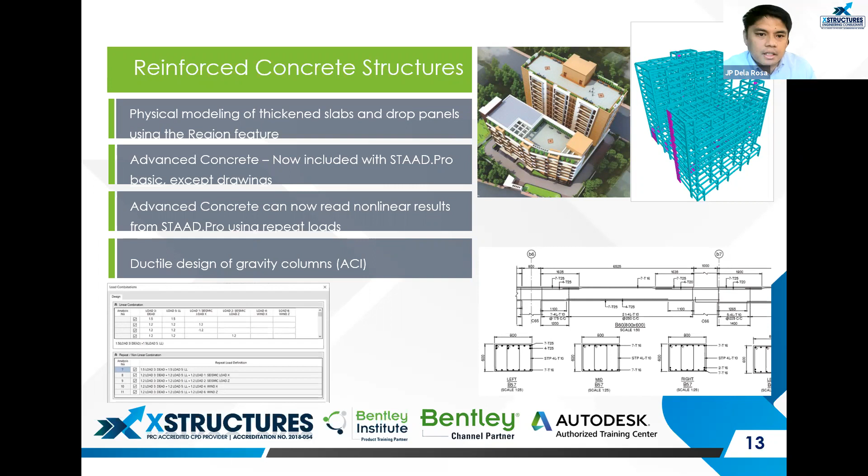Okay, so structural worksuite - for this webinar series, we're gonna show the integrated applications of STAAD.Pro, the RCDC, RAM connection, steel AUTODRAFTER, and RCDC FE. So at least 5 softwares we're gonna integrate, directly, direct integration.

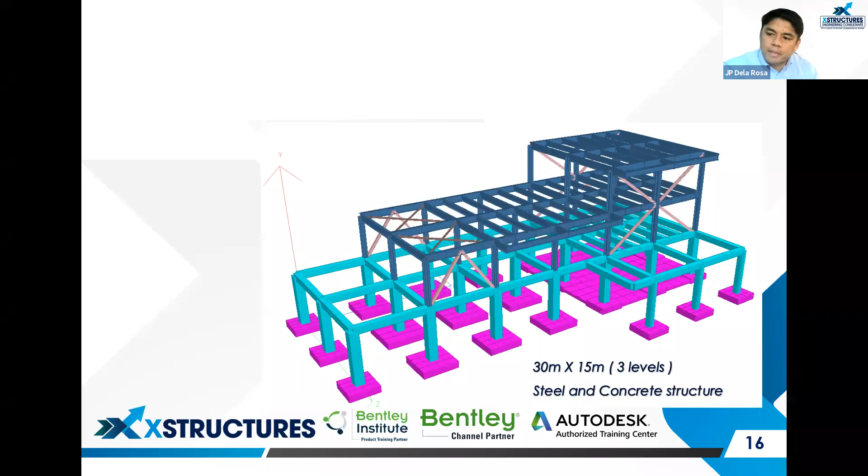Okay, so this will be our sample structure for the integration. I will use this model for full integration. It's a 30 by 15 meter, 3 level steel and concrete structure. And the problem statement here is: how many hours do you need to substantially deliver the analysis and design documents of this structure? How many hours do you need to spend on structural modeling and analysis?

How many hours needed for analysis and design reports preparation, design drawings, estimates, bill of materials, bill of quantities, and project schedule? So based on our experience, it is reasonable to spend 136 hours of design time for this structure, but only using structural analysis software - let's say STAAD.Pro only, STAAD.Pro, Excel, and AutoCAD. But actually, this would be composed of a team of engineers and drafters.

I would like to show here that even a single engineer can do all the work, like a one-man design team, using of course integrated software. So you're gonna see later how. Okay.

Okay, so this is how I break down the 136 hours. Okay, so 24 hours will be for modeling and analysis. And then another 32 hours for design, review, and detailing. Okay, and then 40 hours for the drawing preparation from scratch.

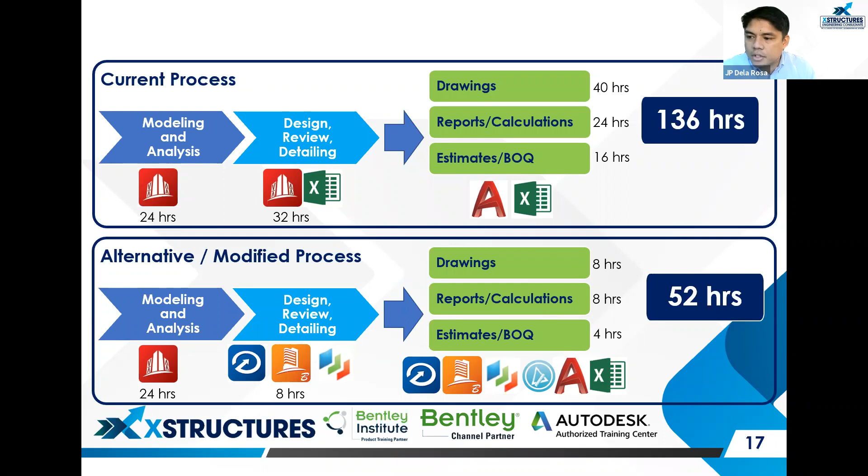So below, we are recommending the alternative and improved process, shown below. Using integrated software where you can have benefits like saving time on structural analytical modeling and reducing error.

As you can see here, above you're only using STAAD.Pro, then Excel, and then AutoCAD and Excel.

With the below recommended process, we're still gonna use STAAD.Pro for the modeling and analysis, so we'll have the same 24 hours. But for design review and detailing, it will reduce to 8 hours only, since we're gonna employ 3 additional software.

We're gonna remove Excel here, your templates in Excel, so you don't need to build your design templates anymore. It's already built in with RCDC, RAM Connection, and RCDC FE. This is all full graphical. Excel is more on numbers and words type, but here it's full graphical.

For the drawings, we can reduce to only 8 hours, since all the drawings will just be extracted from the software itself. RCDC and RCDC FE can produce high quality drawings, which you can simply export to AutoCAD and put on a proper title block, and that's it, you already have the final plan.

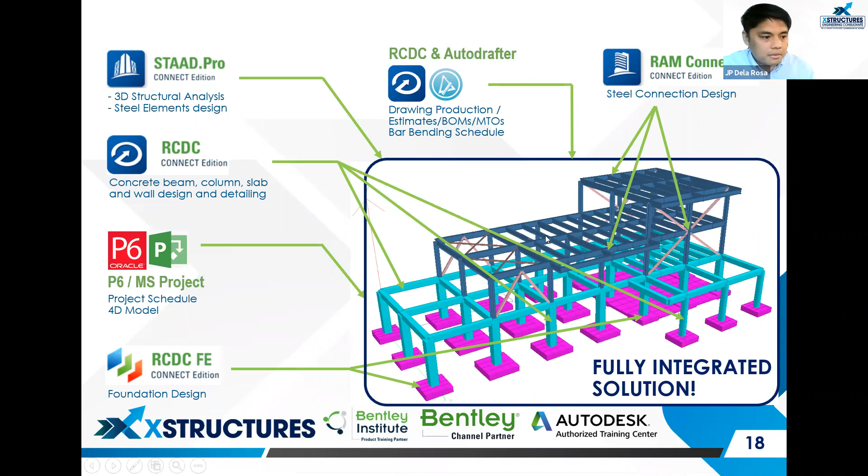Okay, so these are the softwares we're gonna use on the integration - 1, 2, 3, 4, 5, so 5 softwares.

STAAD.Pro is a general purpose structural analysis software for buildings, bridges, containment structures, embedded structures like tunnels and culverts, pipe racks, steel, concrete, aluminum, and timber buildings, transmission towers, even elevated water tanks, stadiums, or any other simple or complex structures. So definitely you can use STAAD.Pro for most of any structure.

So even if you want to do a finite element model and analysis, as you can see here, up to this level of analysis, STAAD.Pro is able to perform.

And then RCDC FE is a software for design, detailing, drawing, and documentation of planar RCC elements like flat slab, raft or mat foundation, combined footings, even isolated footings, which are analyzed using finite element method in SAFE or STAAD analysis engine. So RCDC FE is not only limited to importing STAAD models, but also from CSI SAFE models as well.

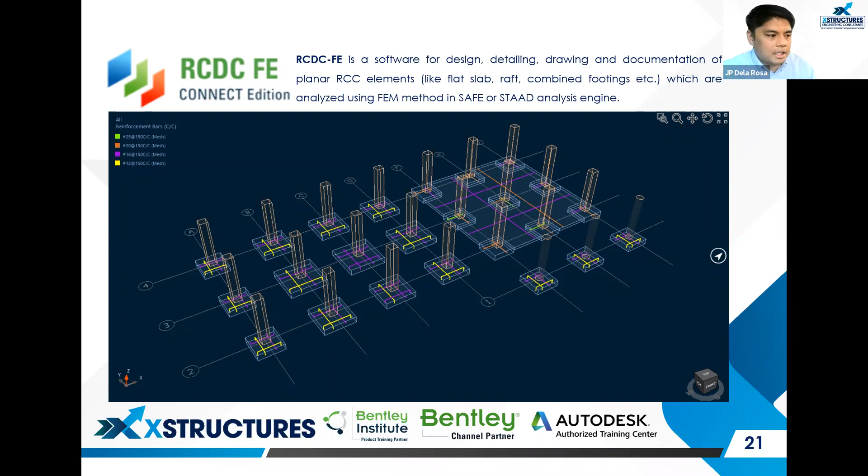So RCDC is the extension program of STAAD.Pro to design and detail concrete elements. The user can design slabs, beams, columns, walls, stairs, and footings with the aid of this program.

As you can see on the image, this is not an AutoCAD drawing. The images you're seeing on the screen are direct drawings generated by RCDC, high quality drawings produced directly by the program. What you need to do is just export it to AutoCAD and put on a proper title block, and then that's it, you will have your drawing.

RAM connection is a tool for steel connection design. It has powerful connection check and design options with optimization. It can be used as a standalone program or fully integrated with STAAD.Pro.

RAM connection is the software that mostly supports connection design, like most of the connection databases available in American design code, British standard, Canadian standard, Eurocode, Australian standard, as well as New Zealand standard. These are the available design codes within the program, including even the older design codes of AISC.

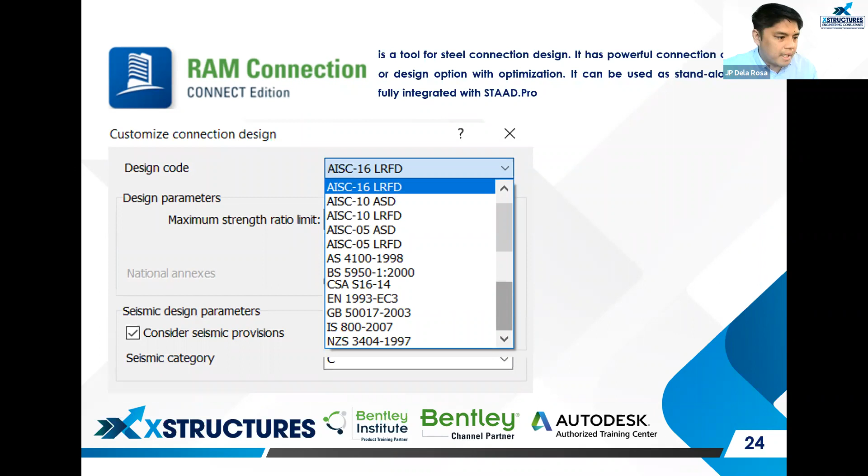Okay, so now let us see the live demo. We're going to see how the software integrates together.

Let me just open my STAAD.Pro model here. This is the sample STAAD.Pro model, so we will not model this from scratch anymore. Here in the Philippines, STAAD.Pro is the number 1 structural analysis software, so most civil engineers and other professionals know how to model on STAAD.Pro because of lots of available tutorials on YouTube.

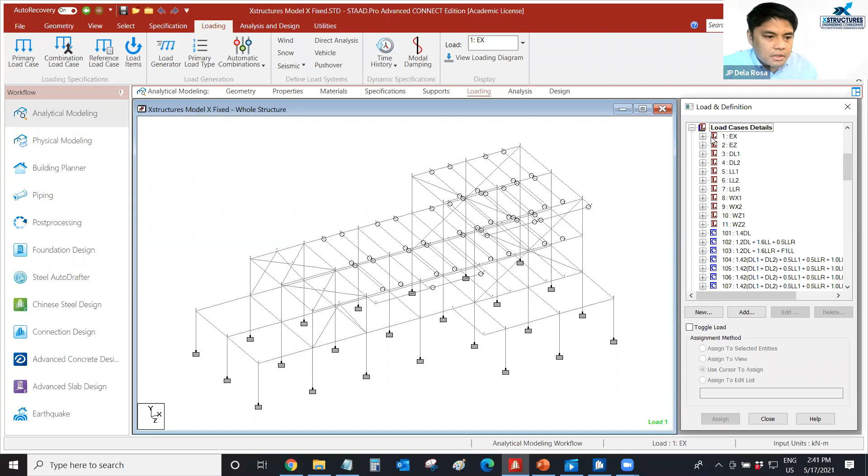We also have seismic parameters here, then standard primary load cases for earthquake loading, dead load, live load, as well as automated wind load. And then the standard load combinations for the design of elements like steel beams, steel columns, concrete beams and concrete columns, load combinations for serviceability like drift, and load combination for foundation design as well, because we're going to design the foundation later in this webinar.

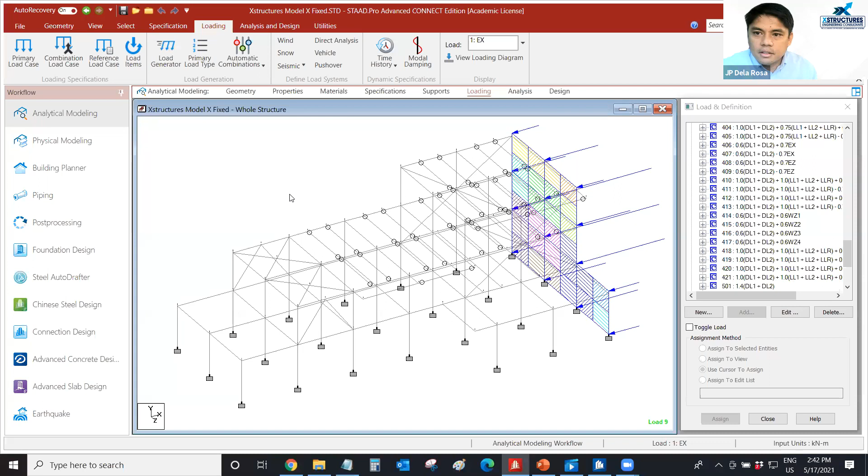So for steel design, we're going to go here on post-processing. I'll just go directly on the output, and then let me just turn on the utilization ratio. I specifically designed some of the steel elements only, I did not design all. As you can see, these numbers represent the utilization ratio, and as long as the utilization ratio is less than 1.0, this means the steel section is adequate.

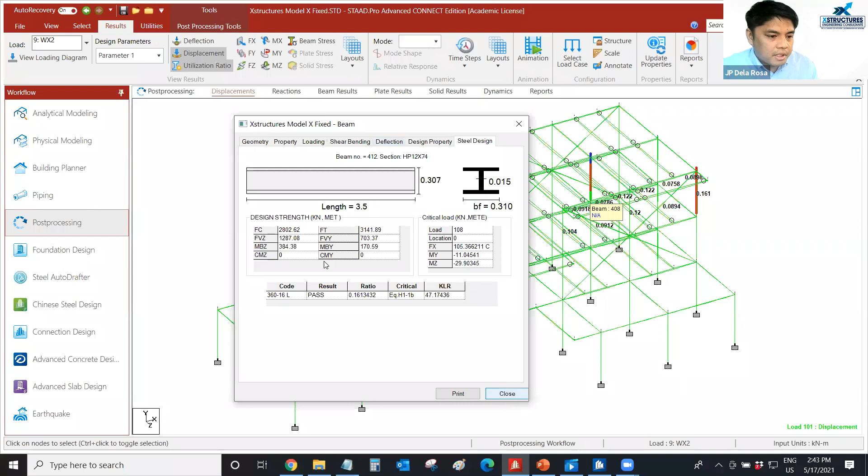If you want, you can review the steel design here, the summary of the output of the steel design. If you double click this member or any member, you go here on steel design and you're going to see the ratio, so it's a pass. Even the slenderness ratio is reported here, and the critical load combination as well as the critical load. So in summary, you can view the steel design output here, but if you want a more detailed output of the steel design, you can go here on utilities and review it from the analysis output.

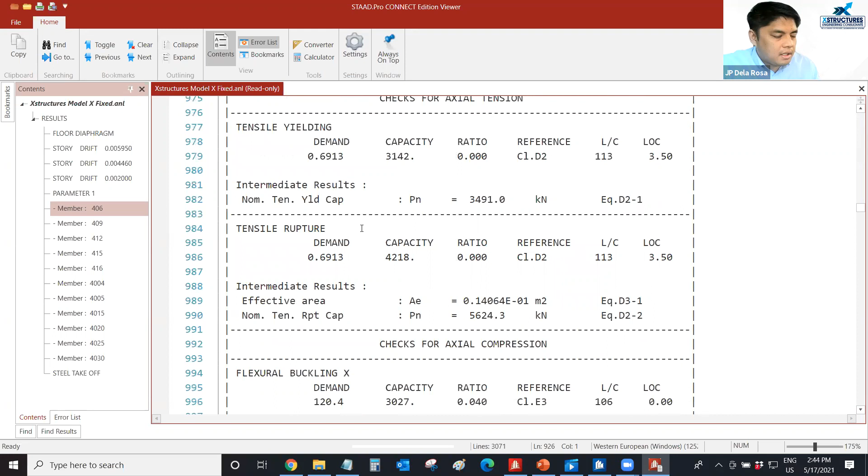Then let's go here on contents, and let's say if I want to view member 406, you're going to get this very detailed steel design output. Okay, so this is the one. And of course, part of the STAAD role in the integration is to do the drift check.

So if I double click this, the program will say if it is passing or failing. So the input here is just the allowable drift. And then STAAD.Pro checks if the structure's drift will be more than the allowable. Of course, if it is less than the allowable, the program will put here pass, and if it is excessive, the program will put fail here.

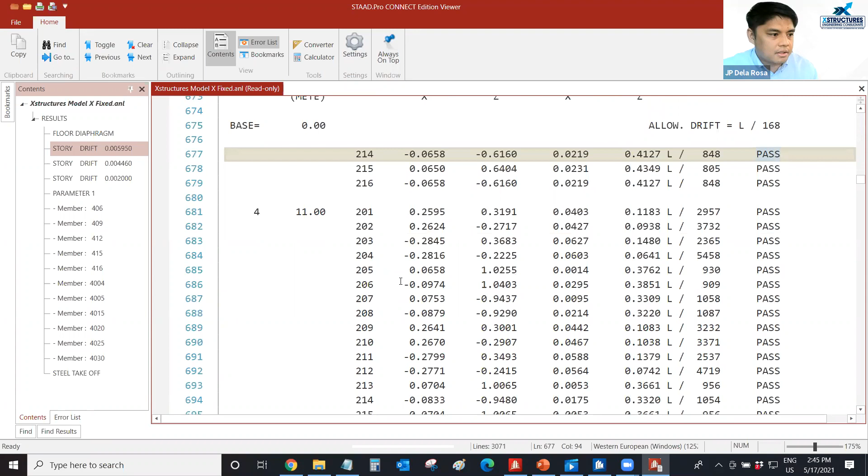And it's up to the designer now to change some of the member sizes in order to pass the drift requirement. Okay, so that will be the STAAD role: modeling, steel design, and drift check. And then with that, we're gonna go with the steel connection design. We're already done with the steel elements design.

So now for the connection design, we're gonna go with RAM Connection. There is a direct link of RAM Connection with STAAD.Pro. The user just needs to go here on the connection design link. Just click close, and then you can design any type of connection here: beam to beam connection, beam to column connection, bracing connection, base plates, or even this X bracing with 8 members. It can be designed as well in RAM Connection.

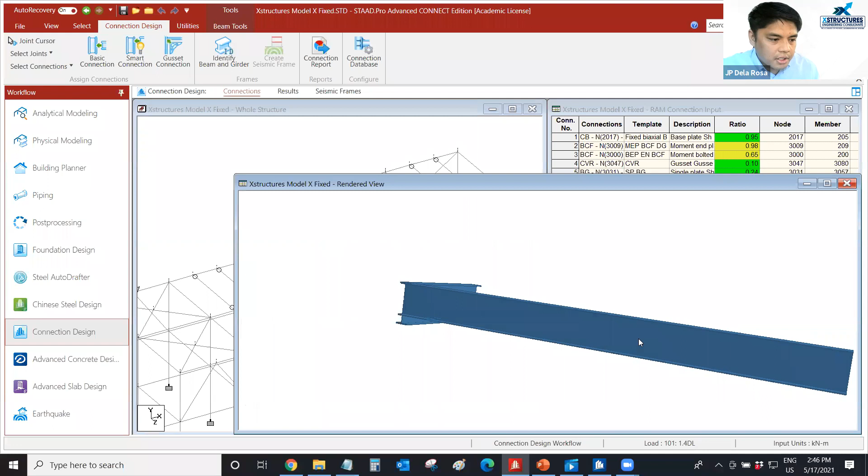Now, I'm gonna only show one sample connection design here, which is a beam to girder connection. As you can see, this one, beam to girder. This is the situation of the joint, and I'm gonna design the connection there.

First, you need to choose which load combination you will use on your connection design, either ASD load combo or LRFD load combination. And then you choose your design code, either ASD or LRFD. I'll be using the latest LRFD. Just click OK. Then I will now choose the appropriate shear connection here.

Since there is a member release at the end of the member, our intention is to have a shear connection here. There are many types of shear connection you can use for joining beam and girder. There is a double angle bolted connection. You can also use a shear end plate. You can also use the most common one, which is the single plate or fin plate, which I'm gonna use on this joint.

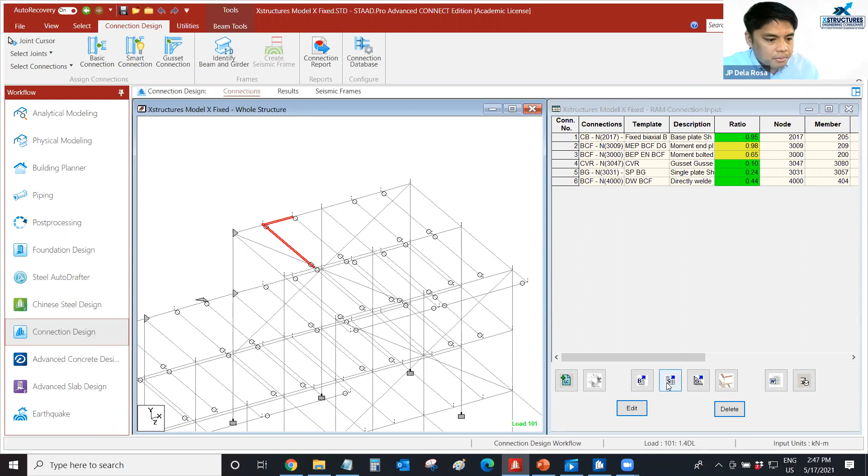So I'm gonna go here on smart connection. I'll click this smart connection, and then I'm gonna use a single plate here, single plate BG, and you're gonna see the thumbnail of the connection here. I'll bring this to the right side, and then I'll just click OK. And then the program says it's okay, no problem with the connection.

But as an engineer, you need to check the output of the program. We shouldn't just accept it, so we're gonna review. That gray triangle symbol represents the joint connection. So if we double click that, you're gonna see this connection design.

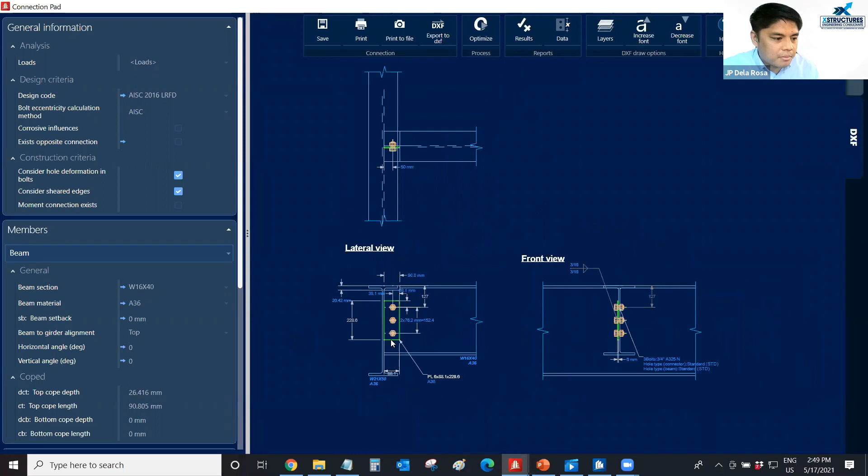We know that there is a plate there and a weld, but we don't know the thickness of the weld, the thickness of the plate, as well as the diameter of the bolts. To know these details, we can simply go here on the DXF view. And this is already the detail of the connection. But some of the distances here, dimensions here, are in decimals, which we can simply edit.

So let's say this 38.1, I can change this to 40 mm. And then this one, let's say 30 mm. Then the cope length, I can make this, let's say, 95 mm, and the bolt spacing or bolt gauge, I'm gonna use 75 mm. So I think all dimensions now are okay. Let me just save this.

And as you can see, the connection design is interactive, since the UC ratio changes accordingly whenever you change something in the connection configuration. So if I make this 4 bolts, the UC ratio changes to 0.11. But anyway, I'll just bring this back to 3 bolts only. So that's already okay.

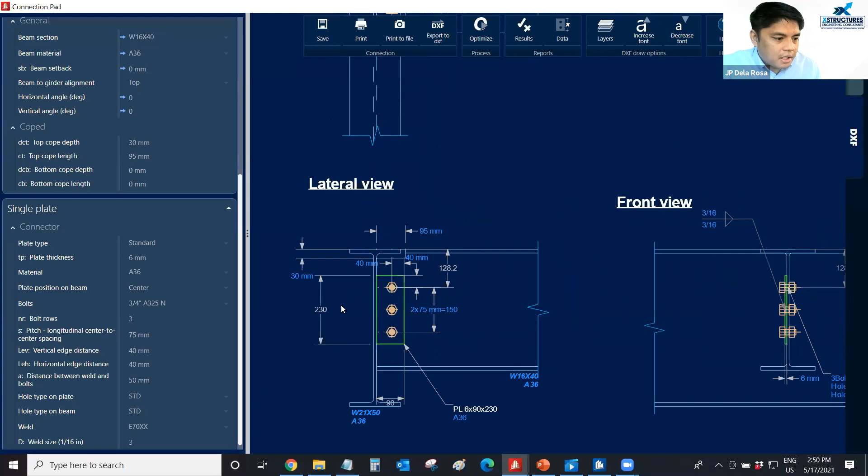This detail will not be wasted since you can export this to AutoCAD and use it as initial drawings. Now let your drafter simply furnish the dimension style here. You already saved the manual drawings we normally do, so you already have at least a digital form of the connection detail.

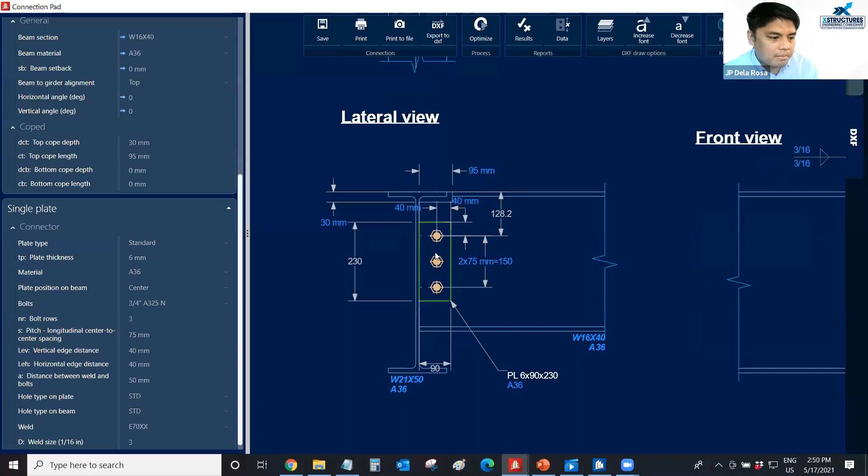So, the next thing is how you're gonna justify this connection design. The program already gives the thickness of the plate, which is 6mm, 3 bolts, 3/4 diameter, and even the spacing of the bolts, the weld thickness, which is 3/16. So how you gonna justify this detail?

This program produces calculation, of course. You just need to go here on results. So this is the result, and as you can see, it checks. It uses all the load combinations, which we picked around 27 load combos. So even if it's 100 or 1000 load combinations, it will be checked one by one by the program.

And this is the summary, the summary of the calculation. Okay, which is this one. And this might be just 1 page of calculation report.

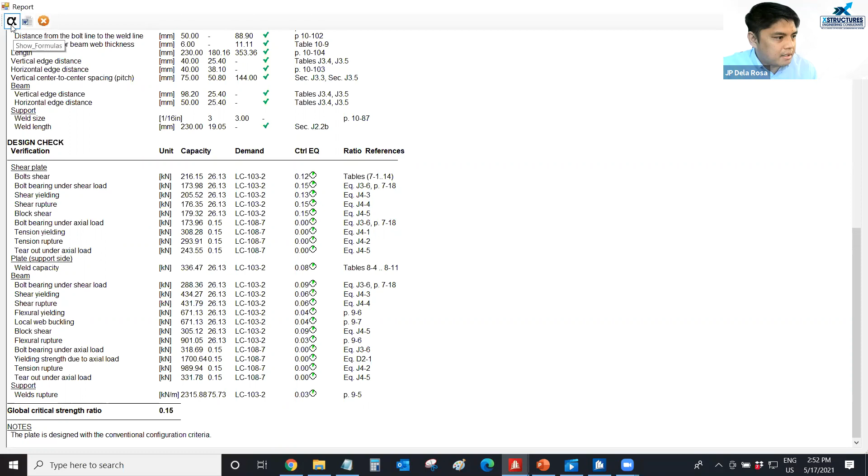And if I'm going to review this connection design report, I will not accept this. So I prefer a much more detailed calculation, but no problem with that, since the program can produce a much more detailed calculation report. You just need to press this tool here. So that single page report might become around 6 to 10 pages of very detailed calculation report for the connection design.

So what you need to do next is either export this to Word, or print directly through PDF and include it in your standard template calculation report. So I'm gonna close this, save it, and then let me show you some other connection types here.

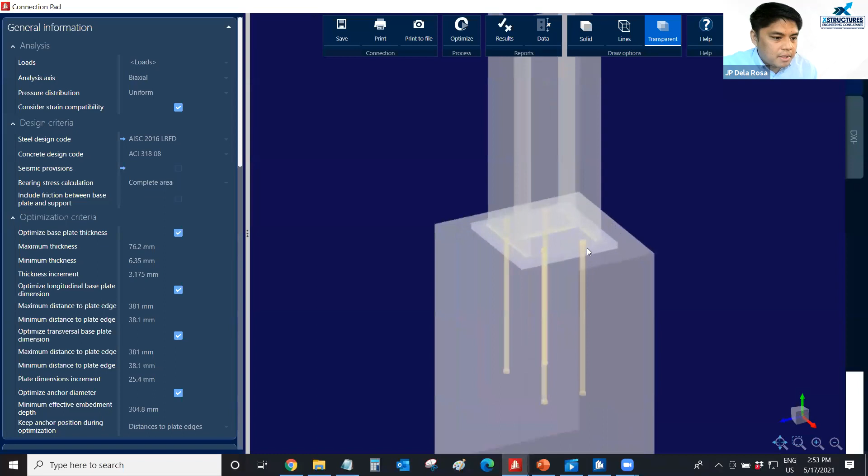You can also design a base plate here. So this is a base plate connection. The base plate design is not only limited to checking the thickness of the base plate, but also the much more critical anchor. So the anchor is being checked as well, as per Appendix D of ACI.

So it checks, and if however the design is critical, there is an option also here if you want to include the reinforcing of the pedestal as additional reinforcement to your anchor.

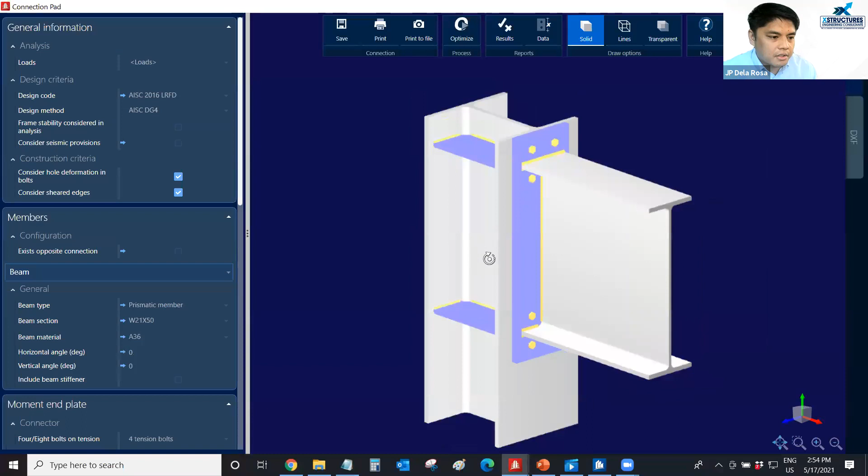And then also you can design a moment end plate here. Very popular in Middle East countries, using this moment end plate. Also haunch connection - you can also design haunch connection, very popular as well in the Middle East, especially in warehouses or rigid frames.

Also bracing connection, chevron brace connection, and this one, single plate, we already shown. Then even direct weld as well, beam to column direct weld connection.

So we're done, we're already finished with the steel connection design. The next step here is how you're gonna produce the drawings. You already finished the analysis and design, but where is the drawing? Because that's what we're getting paid for - the submitted drawings. So how you gonna produce the drawings?

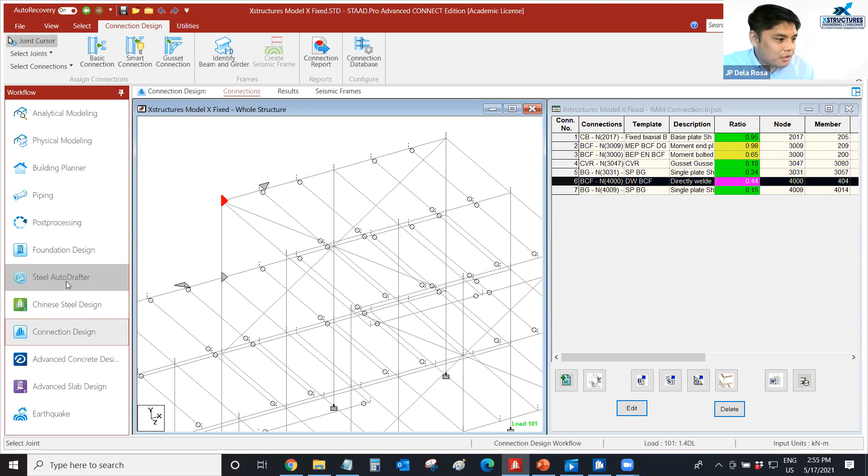So we're gonna go here in Steel AutoDrafter. Just click the link here, Steel AutoDrafter. So now here is the model, the Steel AutoDrafter model, where if I select this member, you can produce either a framing plan or elevation drawing. If I select this member, I do right click, and let's say I want to produce a framing plan. I just click that, and I click this draw tool, and so this is already the output.

As you can see, very high quality drawings produced by the program. So you've already saved time producing these drawings. The drawing already has grid lines, and even the web thickness, the flange thickness, is exactly drawn as per the STAAD section.

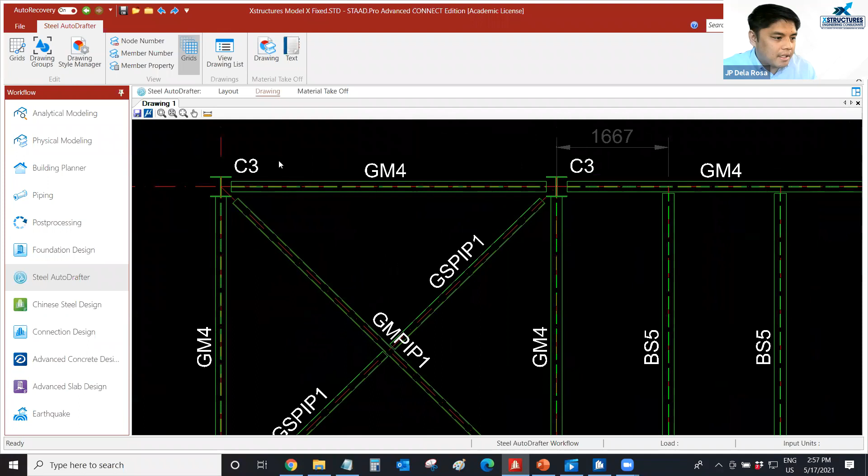Okay, so you already saved time on preparing the drawing as well as checking the members if they're placed right. Because sometimes if we're giving this task to the drafter, you give the scratch drawing to the drafter, let the drafter do the drawings, and then you check after he draws the plan. So dun pala makakasave ka na ng time, because you don't need to do that anymore. You just extract this drawing directly from the program.

Okay, so then I will also produce an elevation drawing. From this member, right click, then draw section, and click that, and this is the elevation drawing. So meron ng elevation marks, concrete and steel sections, drawn automatically with high quality output, of course. You can produce it at any plane here, so kung saan mo gusto mag-place ng drawing, walang problema.

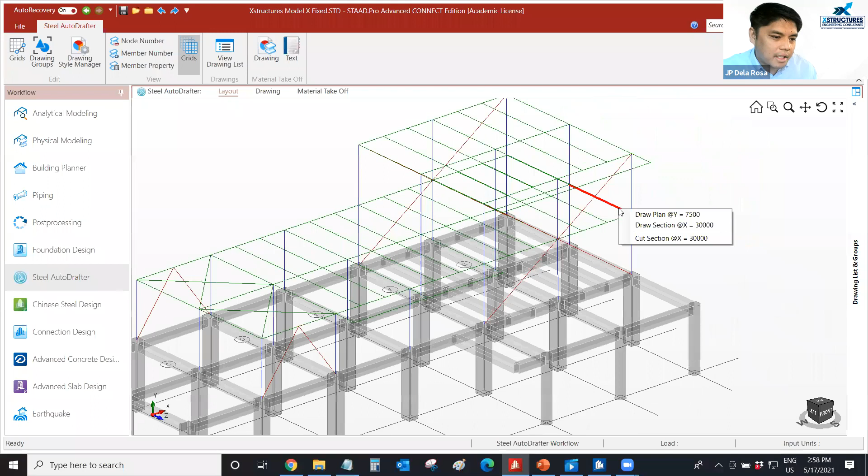Even in the other direction, let's say here, I select this member, right click, then let's say I want to produce an elevation drawing here, and I just click this one, and that's it. That's already the drawing. So if you just imagine, ang laki nung masasave mong time with the AUTODRAFTER. So that's why we can prove that we can save as much as 60% of your design time using the integrated software.

Okay, so now we're already okay with STAAD.Pro, RAM Connection and AUTODRAFTER. Now we're going with the concrete design, where we design concrete beams and concrete columns, and we'll need to use RCDC. There's a direct link here to RCDC, so i-click ko lang ito.

Okay. So, unang-una kong gagawin dito is just to pick NSCP 2015. This program already supports NSCP 2015 recently. And we from XSTRUCTURES prepared all the necessary calculations and technical notes for the NSCP design code, and we gave it to the Bentley developer para mapunta yung NSCP design code within the program.

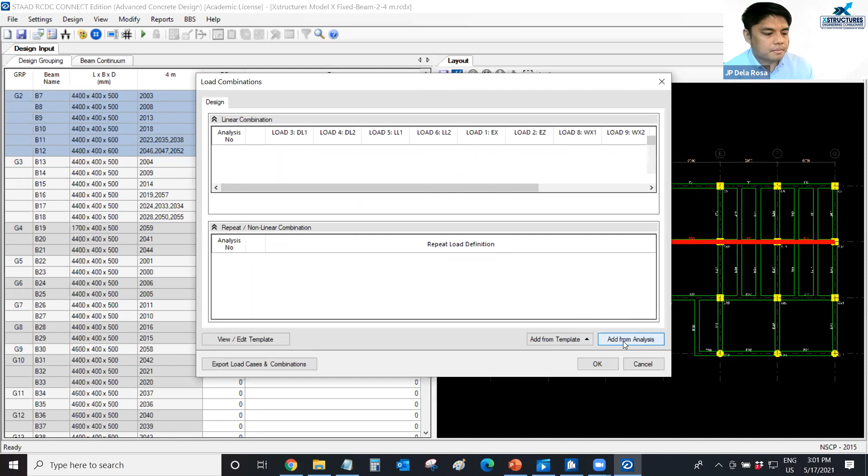Then we're going to get the load combinations from STAAD.Pro, so I'll click add from analysis here. Okay, I'll click no here, and pick load combos in the 100 series only, and remove some other load combos which will not be used in the design. I'll click OK. Then I go to settings, general and reinforcement.

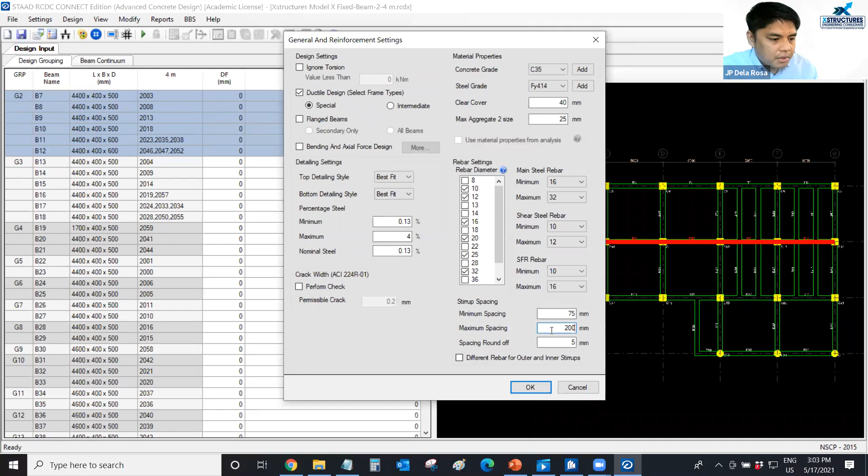We're going to use a special moment frame as our standard frame here in the Philippines. I'm going to use 5,000 PSI concrete, C35, and grade 60 steel. Minimum 16 rebar diameter, maximum 25, or maybe we can use 32. Let me uncheck this. Then I'll control the maximum spacing of the stirrups to 200 mm, and 200 mm spacing. I'll click OK.

So we're now ready to run the design. I'll click auto design here. And that's it. All the beams are already designed, but we can also group them by going to modify, then auto group beams. Automatically all similar beam designs will be grouped by the program and put on the schedule as one beam detail. So now we've already grouped the beams.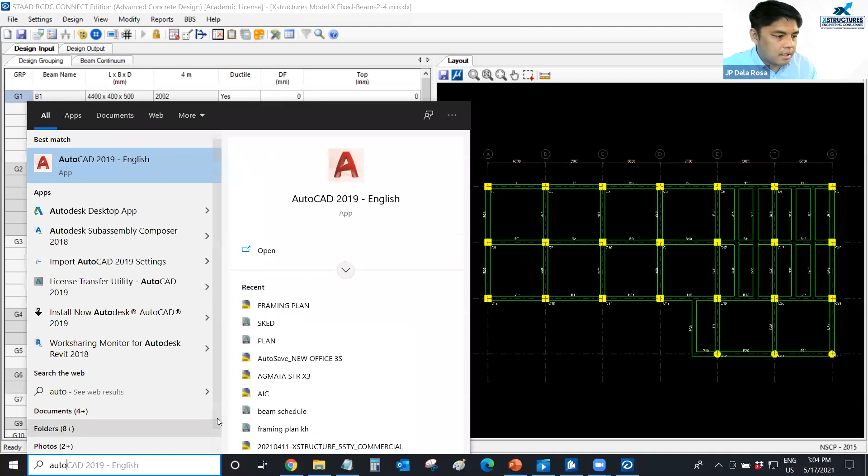So ang next lang na gagawin natin dito is to produce the schedule. I think I need to open my AutoCAD here. Let me just open the framing plan. Okay.

For me to show you what you'll do next after the RCDC. Okay, so I have a framing plan here already. No, it's a title block.

Then, so I'm gonna produce here the text schedule. Automatic group beams, click OK, and that's it. So you already have the framing plan, and you already have the beam schedule. So I'm gonna export the framing plan.

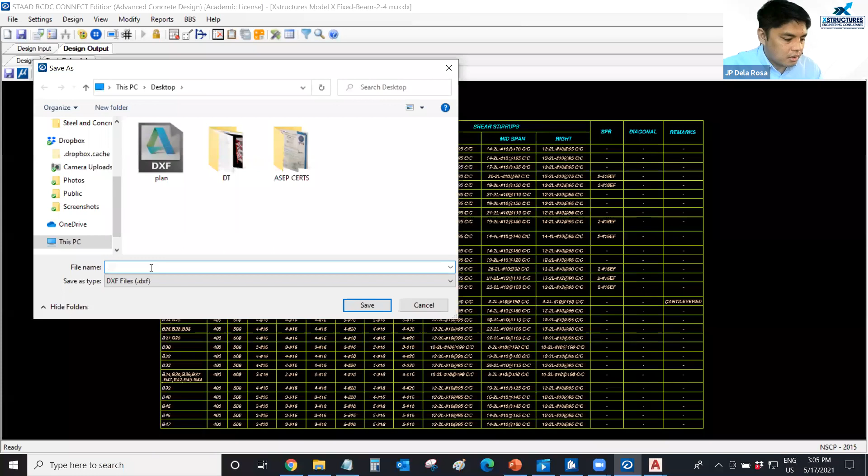Let's say it's on the desktop, let's say plan. And for this one, I'm gonna click save, and I'm gonna call this sched. Okay, so now I'm gonna open those DXF drawings, the plan and schedule. And I'm gonna copy this and put it on a title block.

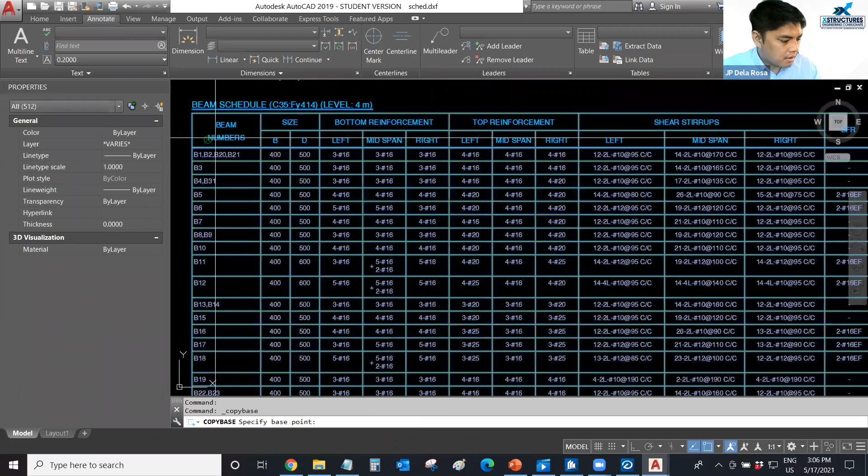So like this. Then, as well as the schedule, and here, so that's it, so the kasya.

Okay, we can scale it naman. So we can move this a little bit, like that. And then we paste the schedule here, kasya na siya. And so like this, so you already have your framing plan and you have the schedule. So very easy, you can produce directly from the software.

And then, how do you justify this design, how you can justify this beam design? So you can just simply go here on reports, and then go here on design calculation. Let's say this one.

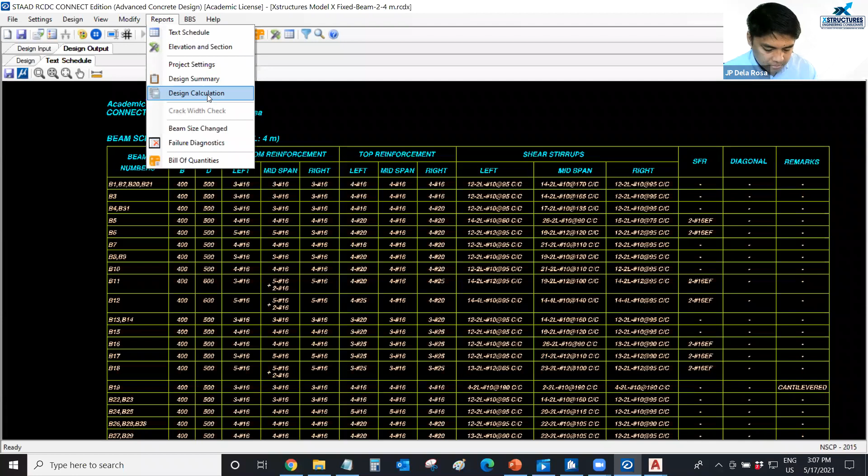And let's say, so there's so many beams here, okay, because all the beams on that framing plan or level will be designed by the program. So let me just choose this B30, just to show you the calculation. Okay, so beam design calculation.

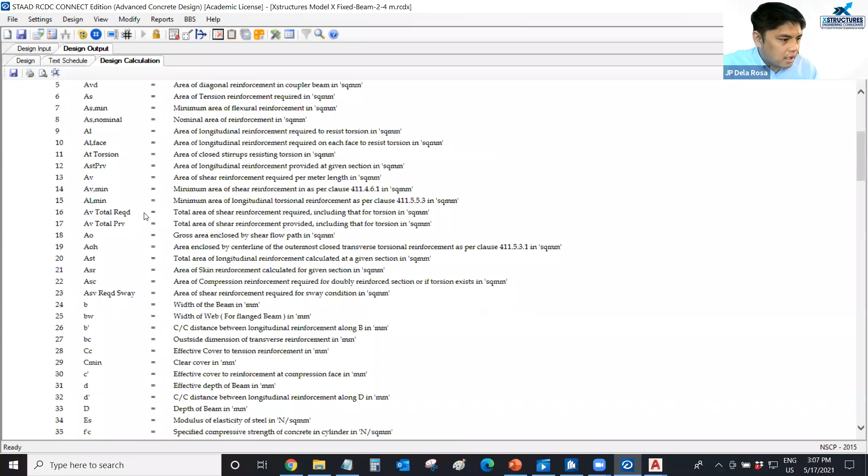Okay, and also it will be shown here what design code you use on the design. So we use NSCP 2015. So it's reported here, all the chapter 4 clauses from the NSCP are being referenced here, and some other additional clauses from the ACI. And so these are the design output.

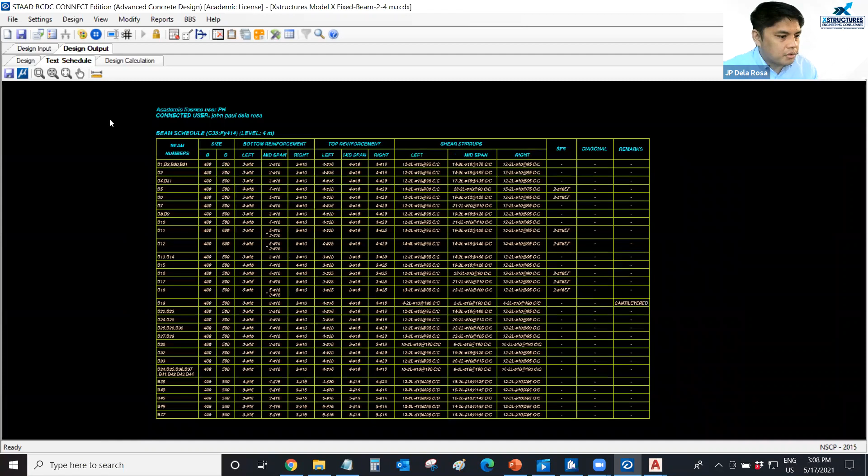Okay, so now, and also this program can produce elevation drawing as well. So if you want to produce the elevation drawing of this beam, just go here on reports and then you click elevation and section.

So let's say this is G3. But we can produce all of the beam drawings. So let me just check all of this. I click OK.

And then, so this is already the elevation drawing that you can also export to AutoCAD. And I think we can have a better drawing somewhere here. So here, since there are secondary beams here connected to this girder, section 1, 2, 3, 4, 5. Then let us review that drawing here.

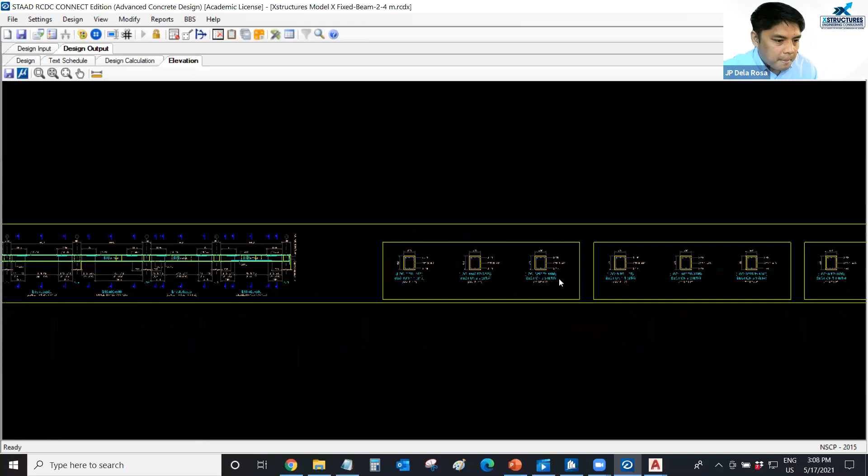So as you can see, we need 2 layers of reinforcing here, here, and here. So as you can see, as you notice, this is already a good quality drawing, automated by the program. So I think no more editing is needed here. It's already a good drawing.

So then you just export this, then you already have the drawing. But my intention here is not only to produce the elevation drawing, but to produce the bar bending schedule, so your work becomes much easier.

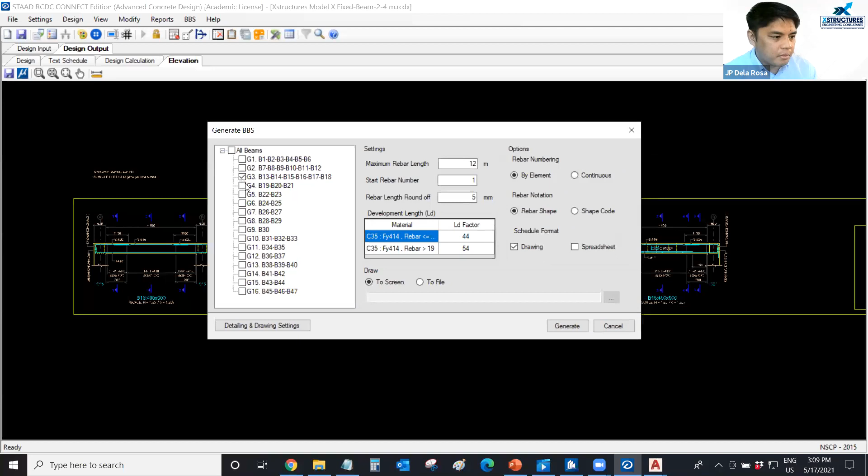So you just go here on BBS, then you click generate BBS here. Okay, and then with the same beam groups, group 3. So you can produce all of these, but I'll be showing that beam group only. I will click generate.

And then that's it. So this is the elevation drawing with the rebar tag marks here. So what you need to do is just check the detail of any of the rebar here from this table. So there, the anchor lengths shown here, as well as the crank length,

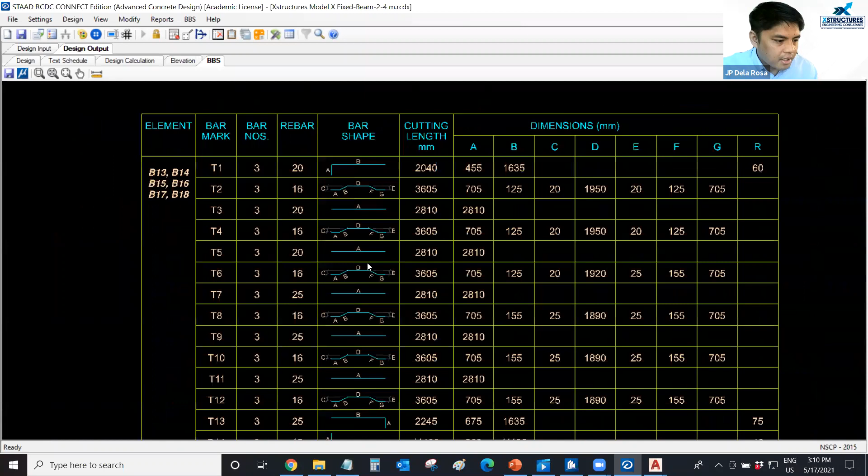and even the detail of the stirrups as well, drawn here. So this is already a bar bending schedule.

Okay, and also what I like with this program is the BOQ, the bill of quantities and estimate. So you go here on reports, and then you go on bill of quantities. Okay, then let me just click this one, BOQ, and it's already set to peso.

So even the peso currency here is already added. Let's say concrete is 5,000 pesos, and the steel is 50 pesos per kilogram. I'll just click OK, and that's it. So for that whole level, we'll be needing 41.53 cubic meters of concrete, and around 5,800 kilograms of steel.

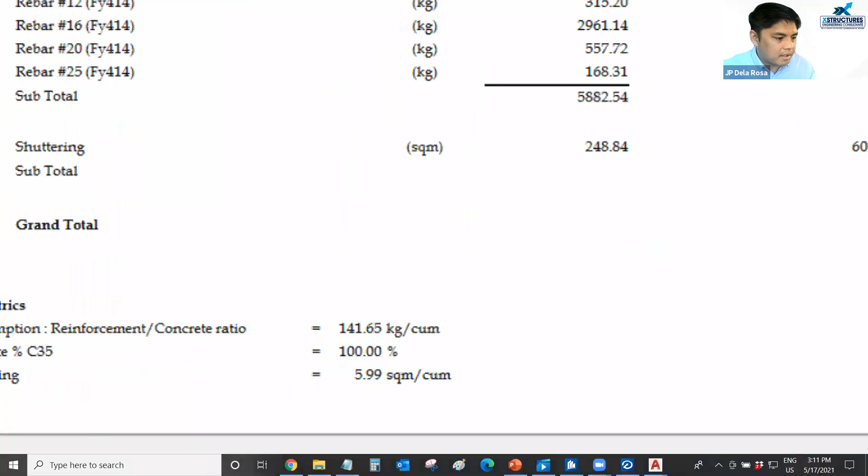What I like here on this BOQ is this design metrics, very important especially for a design manager to know the ratio of reinforcement compared to the concrete volume. So the program gives the weight of the steel compared to the volume of concrete. Please take note that this rebar to concrete ratio includes the anchor lengths and splice lengths. So it's much more precise than doing it manually.

It's hard to do this, to estimate all the rebar manually, but the program can just simply give you this ratio instantly. Once you've designed it, you don't need to estimate the rebar anymore - you already have this output.

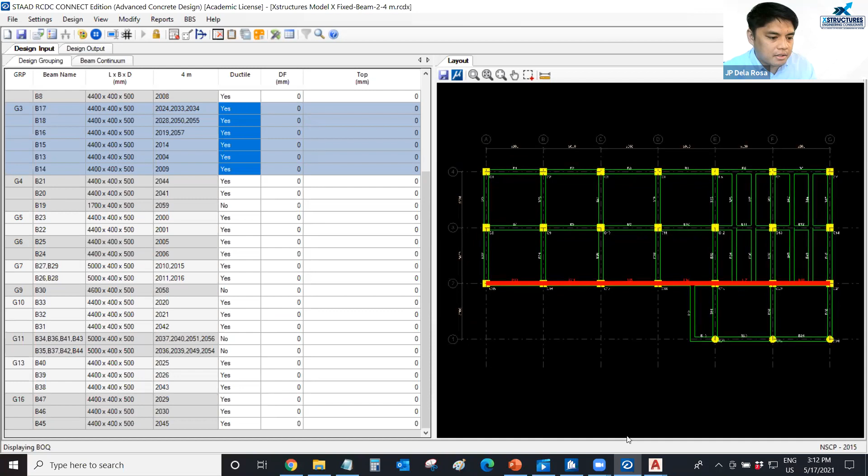So that's it for the beam design, using RCDC. The next one I'm going to do is the column design. Let me just double check the final plan - so this is our final plan.

For the report calculation, you just get it from the reports - either you print it, export it to Word, or directly print it through PDF. Now let me just close some of the unimportant drawings here.

We don't need this. So after this, I'm going to close this, and then move on to column design.

For column design, we'll go here again on RCDC, using NSCP 2015. I'm going to call this column design. Client: XSTRUCTURES. Engineer: I just put my initial. Column and wall, design code - now I'll just click create new project here.

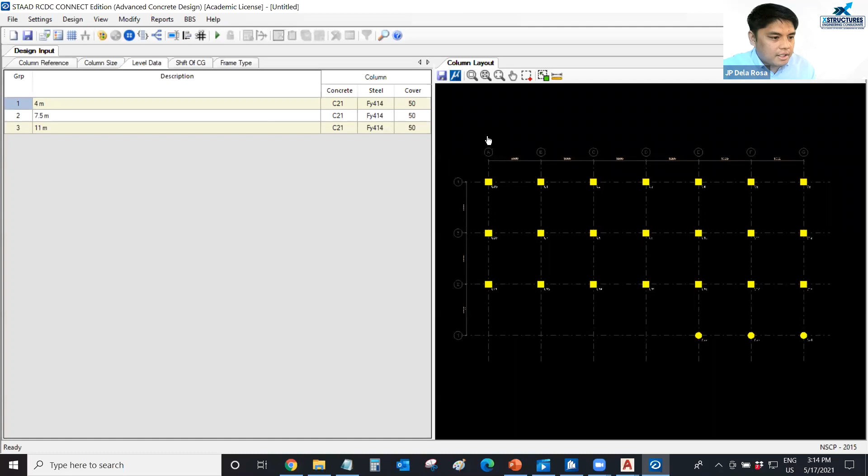This is always the case with RCDC, so let's save this first. Then we set the basic load cases - dead load, live load, and this one is roof live load. This is WindX, WindZ. Okay, now just click OK.

Then again, we're going to bring the load combination here from STAAD.Pro, so click add from analysis. Just click no, since we might accidentally remove some of the load combos - that's why I pressed no. Now we're going to include the 100 series load combo, select, also up to 127. Removing other load combos and select, up to the 127 series. I will click OK.

Then we're going to set the design settings here. It will be a special moment frame, and we're going to use a single rebar here. I will just click OK.

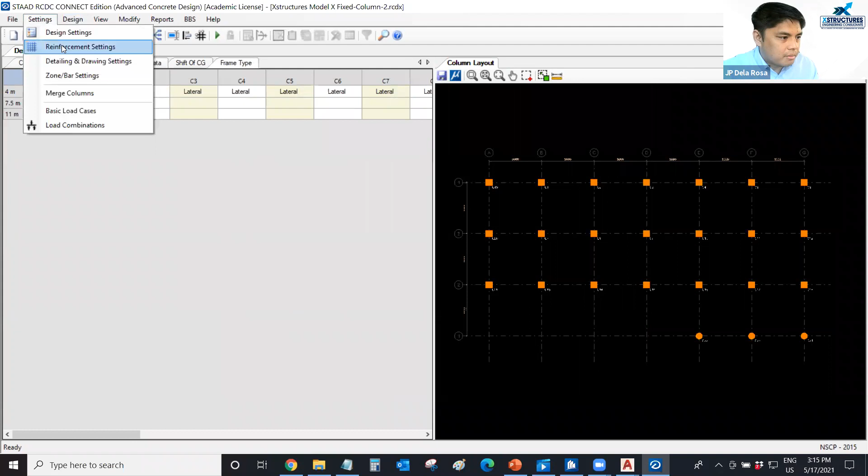Then I'll go here on settings and reinforcement settings. We're going to use minimum 16 rebar diameter, maximum maybe 32 is possible. But anyway, the program will automatically select from 16 diameter up to 32 diameter. Then I'll control the spacing of the stirrups, maximum 150. I think 100 would be okay.

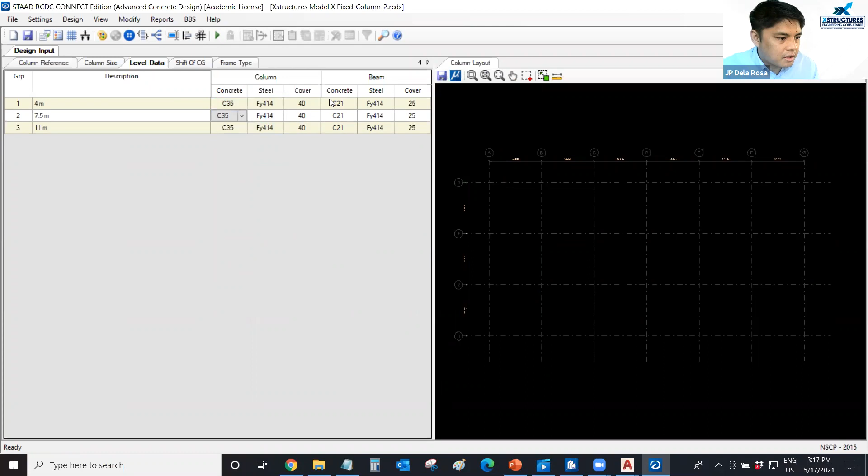Now I'll just click OK here, then go to level data, and we're going to use C35 concrete, grade 60 steel, with a 40mm cover here. I'll just copy all this detail, paste it, and paste it here as well.

Okay, so now all is okay, and we're now ready to design all the columns. I'll go here on design and click auto design. And that's it - the program already designed all the columns.

Since we have so many column designs here, the program can automatically group them. If you were to do this grouping manually, especially with multiple levels of columns, it would be confusing and very time consuming. But since this is a computer program, it can determine which columns have matching details. So we'll use that software capability - just go here to modify and click auto group columns. As you can see, we have 24 different column designs.

So if we go here and modify and click auto group columns, and just click OK. So we can group it into 3 column details, which the program already did. And also, the program puts the rebar ratio here, which is 1.4%, 1.74, and 1.11.

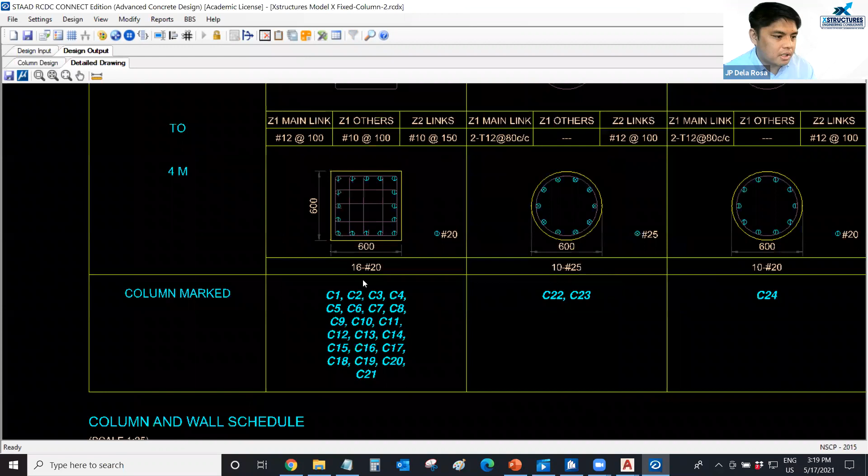Now the next thing we'll do is produce the detailed drawing or column schedule. So I just click detailed drawing, check all the columns, and click OK. So this will be the column design. Most of the square columns are having similar detail, so it grouped into one: 600 by 600, needing around 16 pieces of diameter 20, and these are the ties reinforcing.

And this is for the circular column design. We can use diameter 20 here, and some other circular columns need diameter 25. Same way with the beam design capabilities.

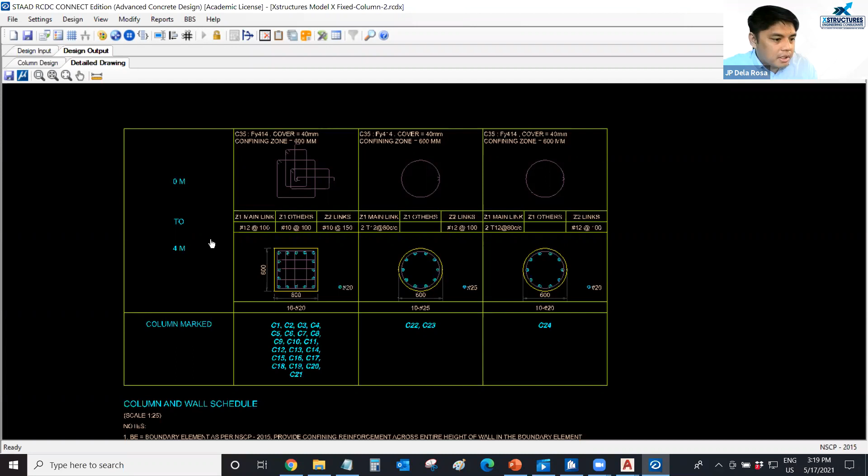The calculation report, the estimate, the bar bending schedule - you can also produce these in column element. I'm also going to produce the design report, but I'll focus on the bill of quantities, because one more important thing for me here is the rebar to concrete ratio.

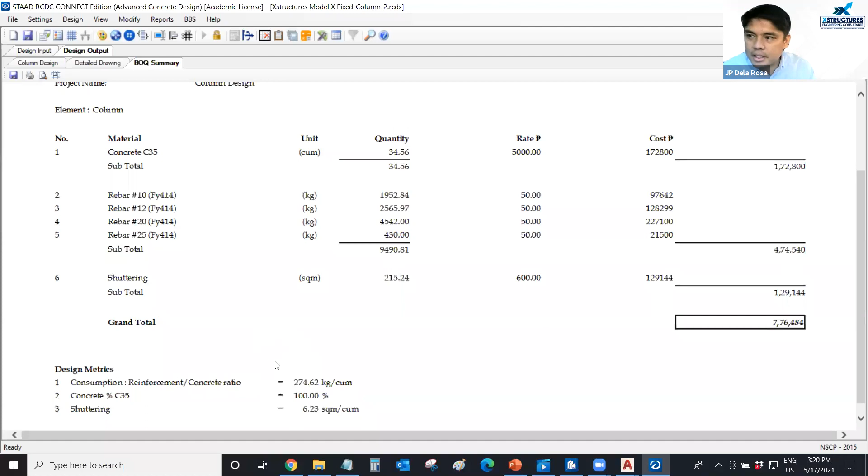Let me put 5,000 pesos here, and let's say this one is 50 pesos, then I just click OK. So we need around 34 or almost 35 cubic meters of concrete, and we need around 9.49 tons of steel. And for the column design, it shows here around 274 kilogram per cubic meter for the column design.

And then, as I've said, you can simply export this to AutoCAD, as well as this schedule. You can also produce a similar framing plan or column layout for the column. So you need an additional title block, then you put the column layout as well as the column schedule. So very quick, you can finish the project.

Okay, so now the program can design slab as well, but I'm not going to be showing that in this presentation. So what I'm gonna do next is show the foundation design. Okay, so I'm gonna close this.

Okay, so now the engineer can use any of the integrated software with STAAD.Pro. You can use RCDC for the footing design, but the footings overlap here in the middle, so in that case you'll be needing a mat foundation. RCDC is not able to design mat foundation - it's limited to isolated footing and pile cap footing. So for combined footing, isolated, combined footing, as well as mat foundation, you can use STAAD Foundation. But on this webinar, I will not use STAAD Foundation.

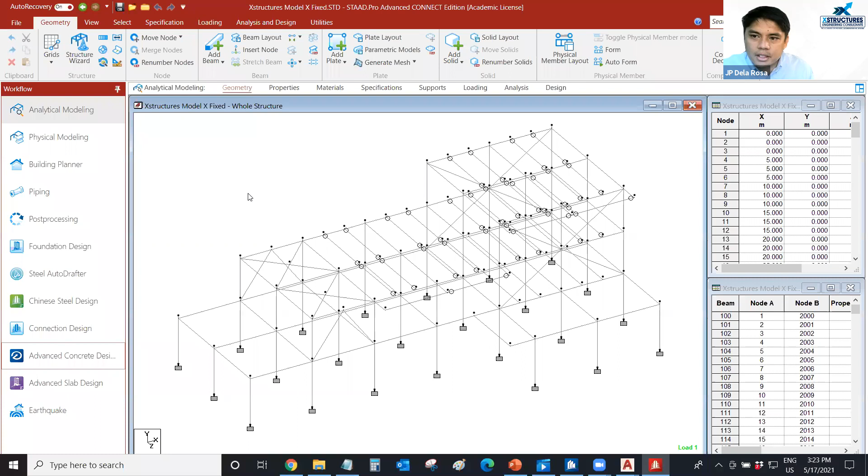So for this case, I prepared a separate model which already modeled the foundation, and you can also use this model to do soil structure interaction analysis as well. So this is what the model looks like - this will be steel, concrete and steel structure. Only the foundation is modeled, and there's local thickening here as well.

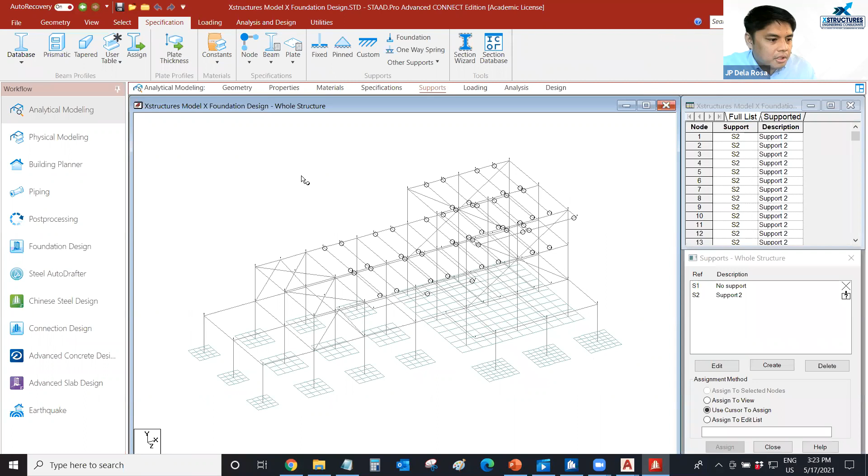So what will be the support type now if you model the plate itself as your foundation? It will be a spring support now. So we go to supports - the supports here will be in the form of subgrade modulus, which is compression-only spring. It will be a plate mat option, Y only, and you put the subgrade modulus here. For a quick calculation, we multiply the soil bearing capacity by 120, and that will be our subgrade modulus value. Then I apply this support to these plates.

So after running the analysis, for foundation design we need two sets of load combos. We need a service load combo for the serviceability check as well as the actual bearing stress check. And for rebar design as well as punching check, we use a factored load combo, which is already set here as load combination 300 and load combination 400.

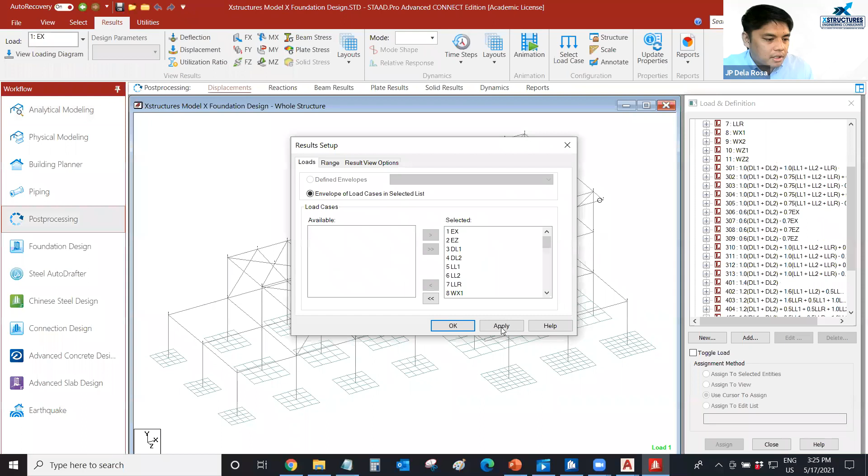Okay, so still in STAAD.Pro, if we go here on post processing, apply, I'm gonna set this to 300. So 300 series is our load combination 300 series, which is our service load combo.

So I can use all the load combos to check the actual soil bearing stress. Let me turn this off, then I'll click plate stress here and set this to base pressure. Click apply. Let me check if this will work. Okay, that's it now. So enhance, apply, and then click OK.

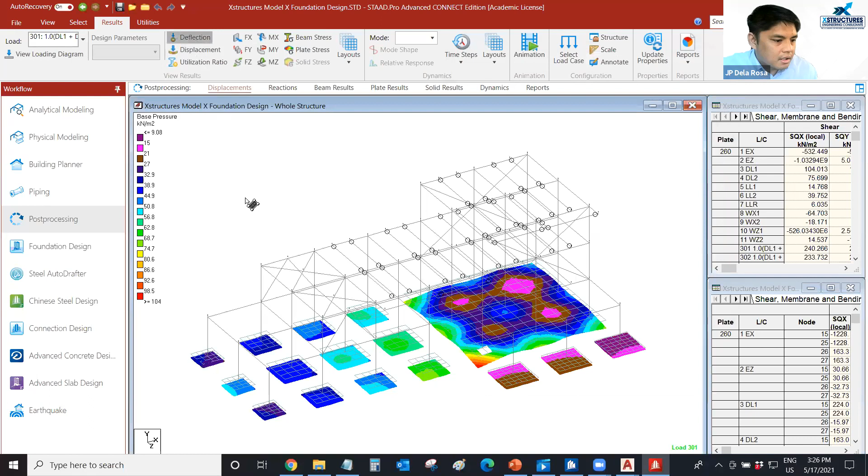Let me turn off the displacement. Then check the actual soil bearing stress here.

The soil bearing capacity I used here is 200 kilopascal. That's why it became 200, then I just multiply it by 120, so I have 24,000 kilonewton per cubic meter subgrade modulus. This means the actual soil pressure should not be more than 200.

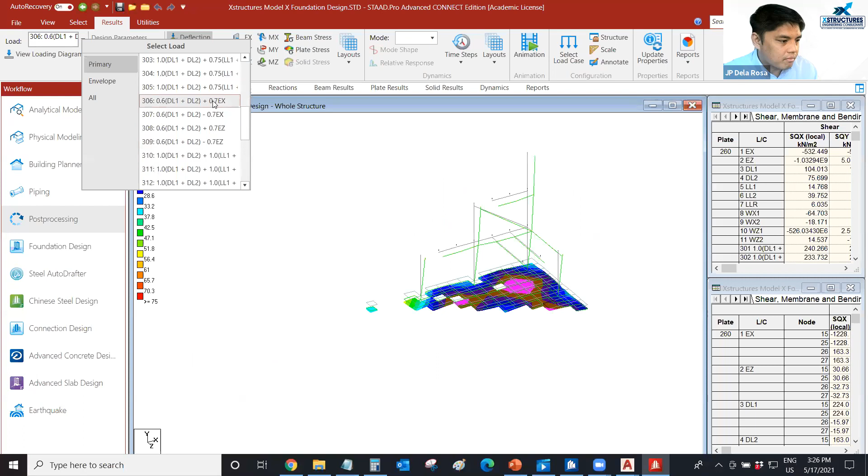So we're gonna check, let's say, the 300 series, to see if there are values more than 200 kilopascal here. But since this is a pre-designed structure, there's no actual bearing stress more than 200 kilopascal here, so our structure is okay.

Now, after this, we're ready to design the plates. It will be checked for punching and also designed for the reinforcing or rebar. So I'm gonna close this and open RCDC FE.

So this is the interface of RCDC FE. We're gonna use 318M 2014 here. For project name, I'll put foundation design. Client name, XSTRUCTURES, I'll just put my initial here, and here I will click this and import this model, the one we used earlier. Then I'll click start.

Let me just click this one, cancel. Just click yes. So it's starting to import the model now. This will take time, depending on the size of the model.

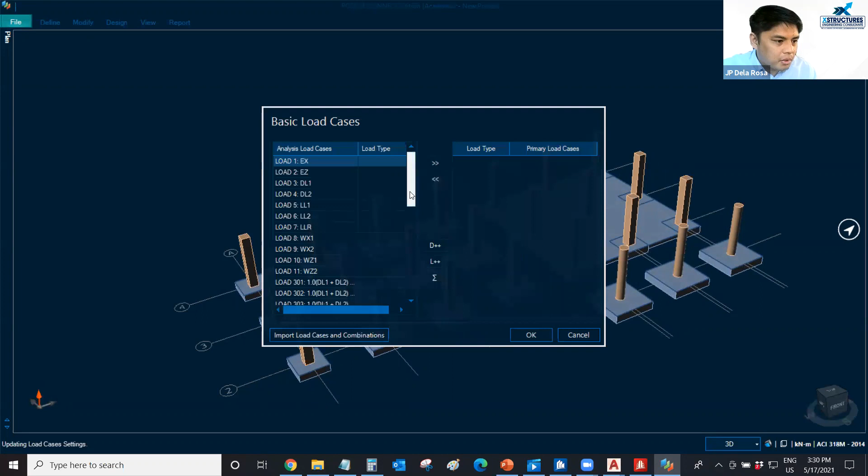So what I'll do here is set the load cases. In this case, we need the 300 load combo, which is the factored load combination. Since this is already factored, I'll set it as dead and use repeat load anyway. I'll bring this to the right side, click OK, and generate here as regular. Since this is ultimate, already factored, I'll just replace this into 1.0.

Okay, so 1. I'll just click OK. So then we need to set the reinforcement. Just click this one. Then I right-click this.

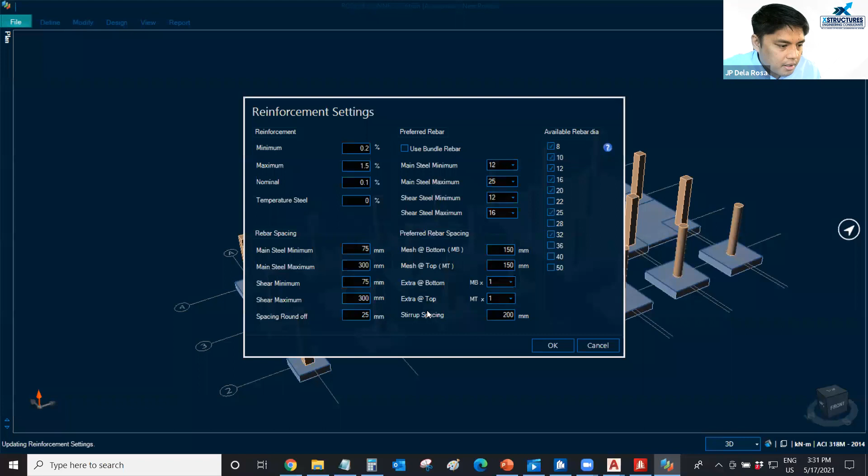So minimum steel rebar, we're gonna use diameter 12, maximum 25. Okay, just click OK. Then we set the design parameters. So we're gonna use C35 concrete, grade 60 steel, then 1 meter strip. Now I will just click OK.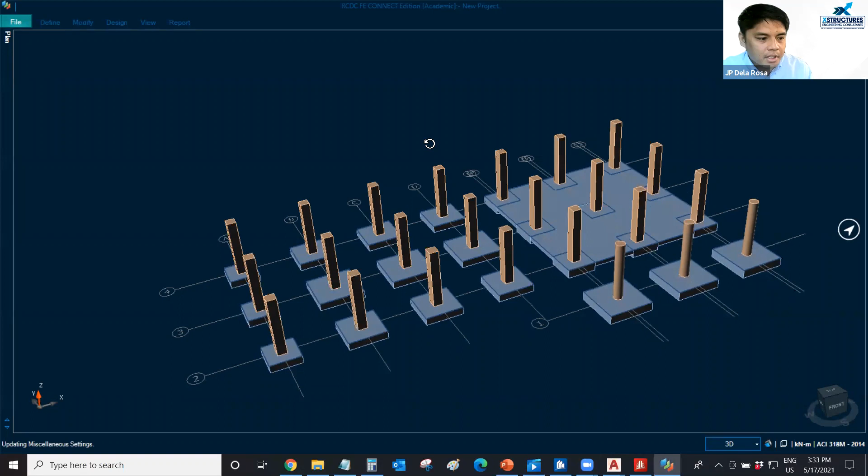So our RCDC FE settings are done. After this, we're now ready to design the foundation. Just go here on design and then click design.

Okay, that's it. Earlier the 3D model was different. So what you can see is the 3D rebar design already, color coded. When you click this rebar, it automatically selects it on the model. This diameter 12 at 150 is the standard mesh of the rebar design. And then we need some additional rebar, which is this one, diameter 16 at 150 and diameter 20 at 150.

So although it's good to see the rebar in 3D, how is it in 2D form? That's what we use for construction drawing. So we can go here on report, and then just click this one, drawings.

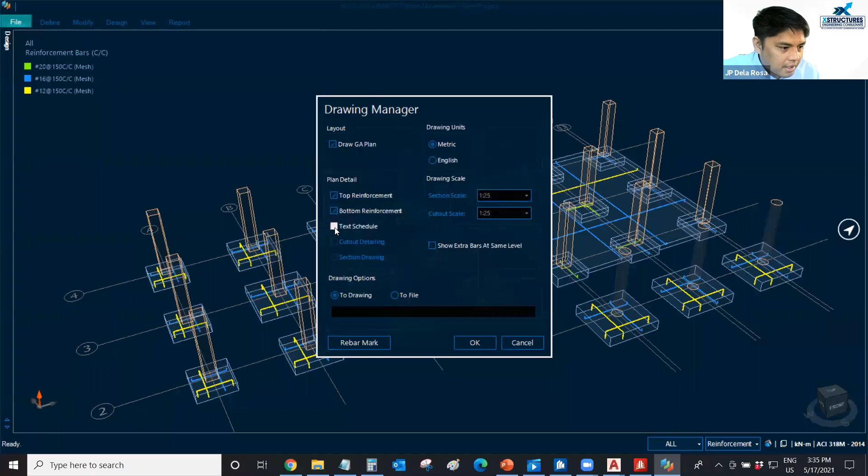Okay, so let's produce the bottom reinforcement, also the top reinforcement, and the text schedule as well. Then if we click OK, that's it.

Okay, so this is the concrete plan of the foundation, with the localized thickening of the foundation. Then this is the bottom reinforcement plan. So these are reinforcing B, which is generic as diameter 16 at 150 mesh, in the X and Y direction.

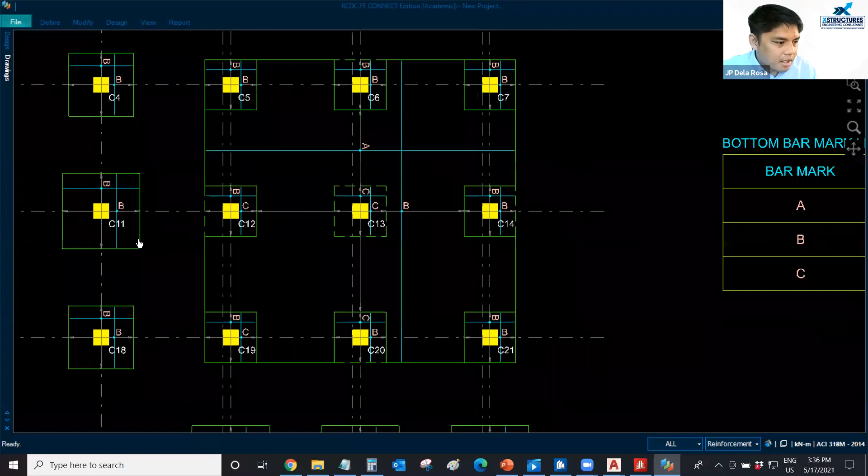So mostly it's B, same for our footings. Then for the mat foundation, we have A and B here. A is diameter 12 at 150 and the other direction is 16 at 150. Then reinforcing C, these are additional, due to high stress at the footing, since it's at the center, we'll need additional rebar here, which is diameter 20 at 150. So it's a combination, 20 and diameter 16, with the same spacing. Okay, so this is for the bottom rebar, and this is for the top rebar.

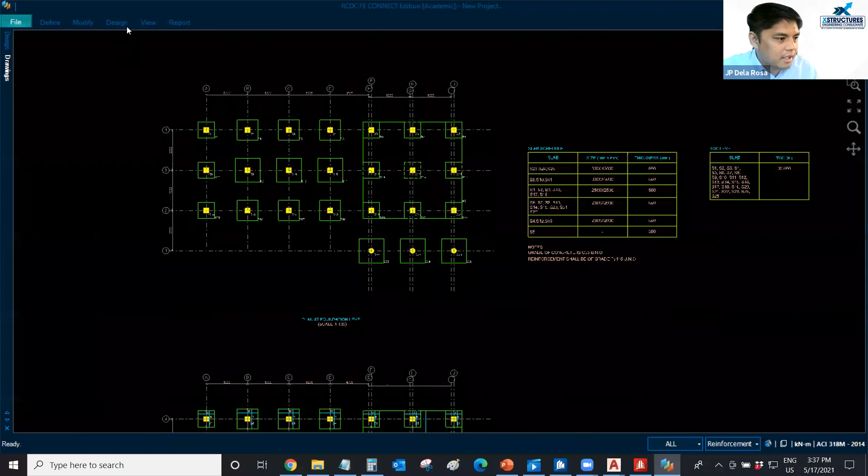Okay, so which is this one. And then if you want to produce the calculation of the footing design, we can go here on report, then calculation. So there are two for the rebar, this for the element design, including the rebar design, and also for the punching check as well. Let's see S1, click OK.

Anyway, so where is S1 here? If we go to view and click slab, let's say, so S1 is this one, I think. Okay, this is S1. These are our foundation labels, S1, S2, so on up to S9.

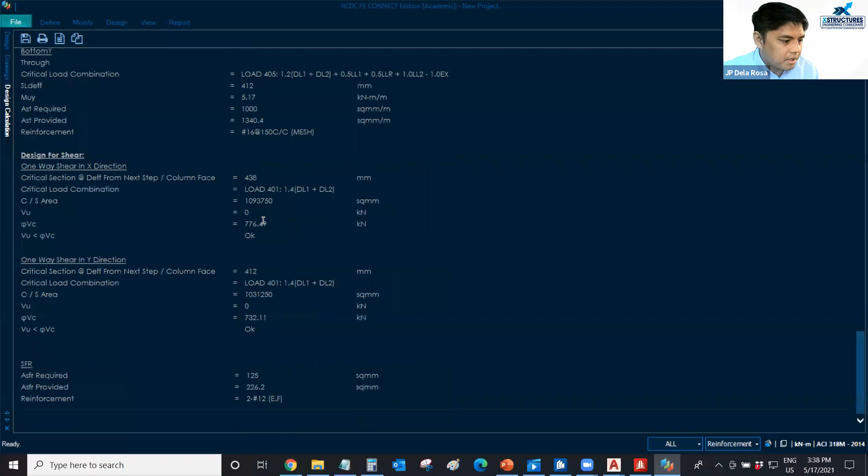And if you want to show the column labels, so C1, C2, C3, and so on, after the foundation label. And then this is the rebar design for that foundation, and then the punching check report, and then calculation.

So also let's say, okay, so for C3. Let me just cancel this. So S1 view, let's say, so for C3 here for the punching check. Go here on define, report, and then calculation, so C3, and then this is the punching check for that specific slab.

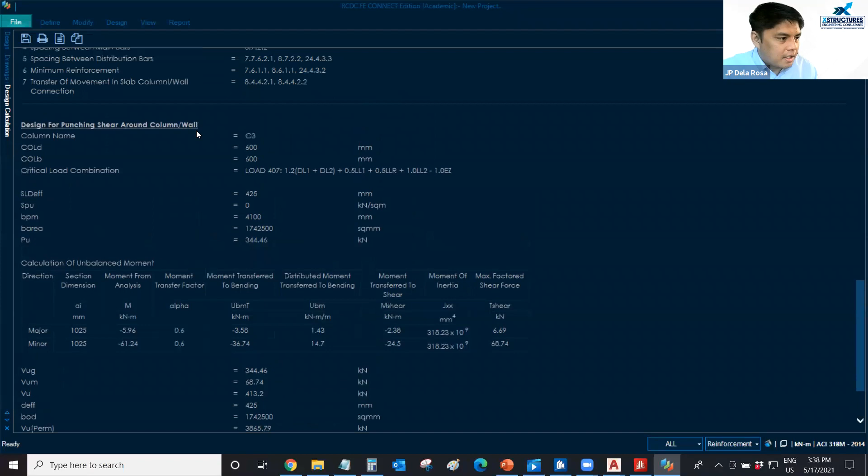Okay, and then of course the BOQ, quick BOQ. Okay, so the program is also producing this bill of quantities, so per slab.

Then, okay, so after this we're already done with the foundation design. We check the actual soil bearing stress on STAAD, but for the element design we use RCDC FE. And for the last part of this presentation, it will be the 4D model.

The 4D model. So if you have the MS Project schedule, and then you put it together, the STAAD model and MS Project or Primavera schedule, to ProStructures. So which is this one. So not exactly the same model, I just use this model, and then you can produce this scheduled simulation.

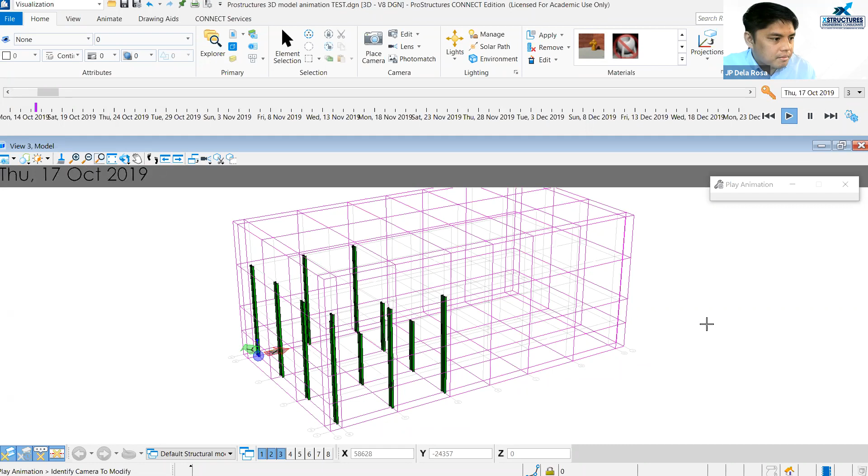So like this one, and you can also play it automatically. Let's say let me play it, and you can also visualize here what will be your accomplishment based on your plan. So let's say here October 2019, at least you know what should already be installed. Then you can compare the 4D model to the actual accomplishment.

Okay, and this concludes the webinar. So then we're going to have question and answer. So we're going to have Q&A now. Maybe we can allot 5 to 10 minutes of the webinar for the question and answer.

Okay, so may there be a question here. Anyway, you can type the question, you may just simply type the question. So there is a question here: what is the difference between STAAD.Pro and Structural WorkSuite license, or Structural Enterprise?

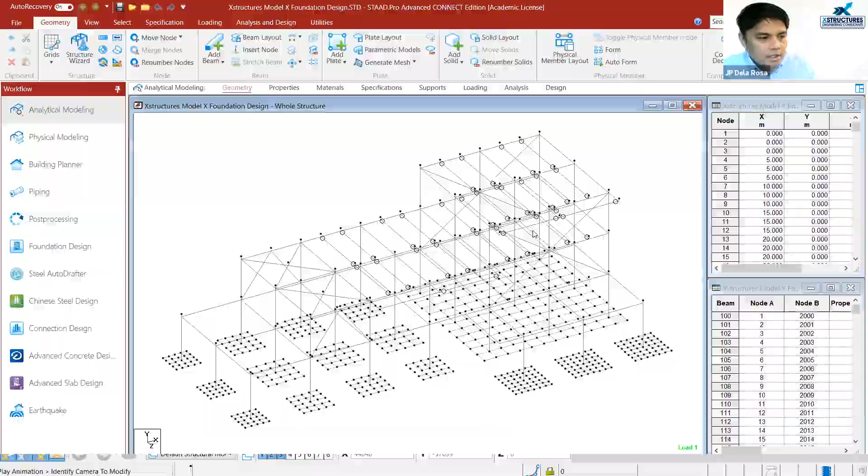Okay, so when it comes to license, so this is the answer. When it comes, especially for those licensed users, so the company that buys licenses. So let me just open this. Okay, this one, this Structural WorkSuite. This one, and that's it.

Let me... Okay, so basically, yeah, a company can buy STAAD.Pro alone, or they can buy the Structural WorkSuite license. See, Structural WorkSuite license, so you get all of this. Actually, the price, okay, I will talk about price so you can see the difference. So when you buy all of this software separately, it will cost you around 4 million pesos, but of course Bentley will not do that, it's too expensive.

So if you buy them as a bundle under the enterprise, so I think the price will be around 15 to 20% only of the overall price when you buy them separately. That's how it is. Actually abroad, I used to sell software abroad, so most of the companies there, especially in the UAE, they preferred more of the work suite than the separate programs. Okay, then the next question is,

does RAM Connection design pre-qualified connections as per AISC 358? Yes po. Actually, RAM Connection supports all, not only limited but all pre-qualified seismic connections. So the reference, of course, is the AISC 358.

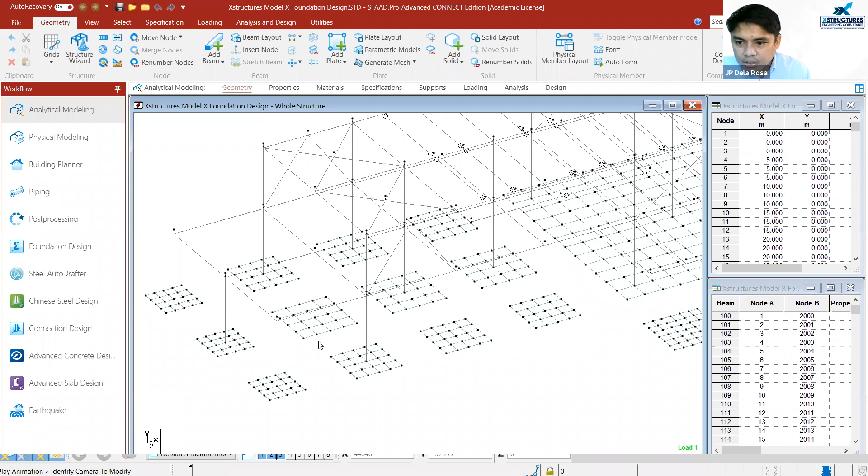There's a question here: why do we need RCDC FE if we have RCDC Advanced Concrete Design? Okay, so RCDC, for slab design, is limited only to suspended slab design using the coefficient method. Now RCDC FE can design the slab.

RCDC FE can design the slab by finite element method. The difference with RCDC is that RCDC FE can design mat foundation, either regular or irregular shape. RCDC can only design isolated footing and pile cap footing, and also by rigid method, not by elastic method. Also the differentiator between RCDC and RCDC FE is the design method, so elastic method for RCDC FE and rigid method for RCDC. That's the answer.

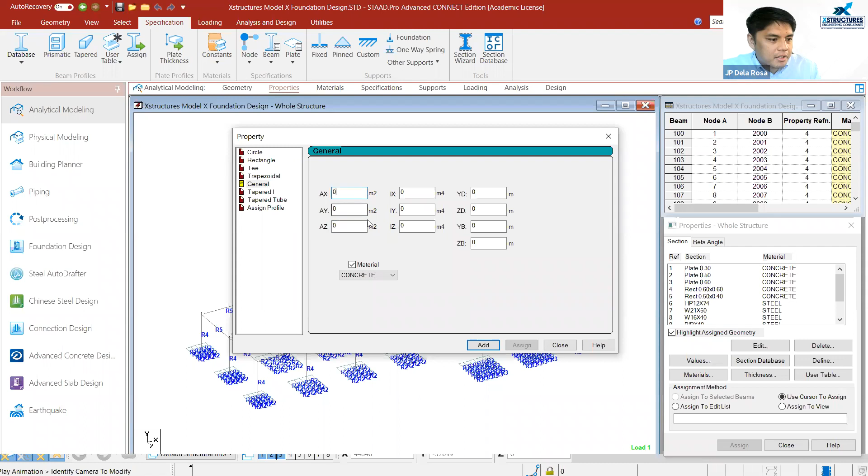So then you can input the new design properties here, involving the modular ratio, and then you apply it to the element, so you need to create a general section for that.